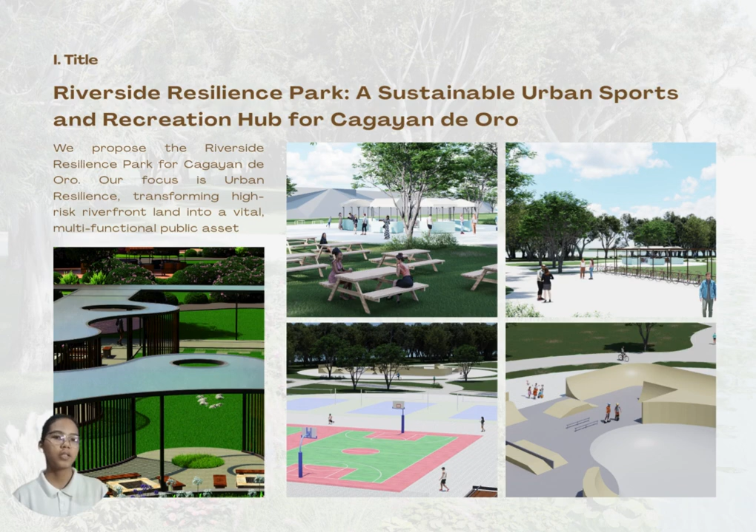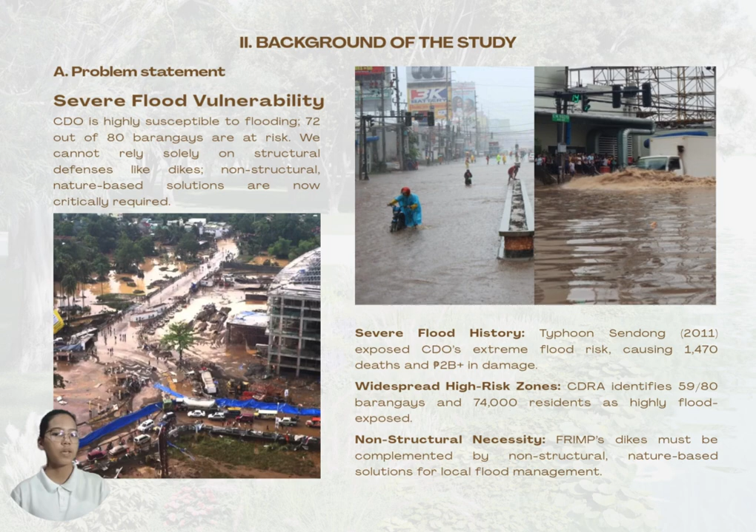Cagayan de Oro is one of the most flood-prone cities in the Philippines. 72 out of 80 barangays are identified as flood risk areas. The city's flood history, especially Typhoon Sendong in 2011, which caused 1,470 deaths and 2 billion pesos in damages, shows that structural defenses alone are insufficient. Dikes and embankments must be paired with non-structural, nature-based solutions to reduce urban vulnerability.

Today, the situation has intensified. Rapid urbanization has added even more impermeable surfaces like roads, buildings and parking areas, further reducing green cover. Despite some isolated tree planting efforts, downtown Cagayan de Oro still lacks continuous tree canopies and functioning green spaces. As a result, urban heat levels have increased, drainage systems are frequently overwhelmed, and 42 barangays now experience the urban heat island effect. The city's natural ability to absorb and slow down stormwater has significantly weakened over time.

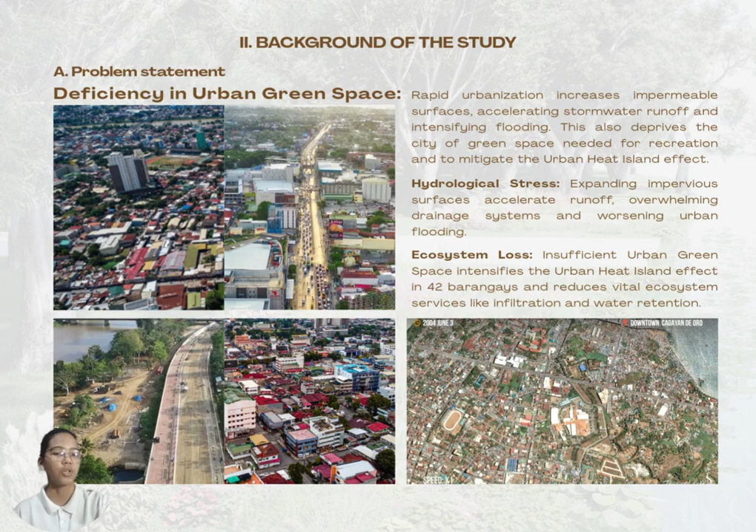Our SWOT analysis highlights why the site is both strategic and challenging. For strengths, its strategic centrality. The site is near City Hall, Liceo de Cagayan University, and Gaisano City Carmen, which ensures high visibility and relevance to the surrounding community. It also offers high accessibility, which supports consistent community participation and daily usage. And lastly, the project has mandated relevance, aligning directly with NEDA's requirement for green infrastructure, making it both timely and highly justifiable.

For weaknesses, the site carries a historical flood risk since it has long been identified as a flood-prone zone. It also suffers from poor existing drainage, which contributes to recurring inundation during heavy rains. And finally, the overall cost of resilient and adaptive infrastructure is higher than conventional development, and long-term maintenance will require steady resources.

For opportunities, the project can act as a catalyst for renewal, revitalizing the entire Carmen riverfront and transforming an underutilized space into a community asset. It also supports education, serving as a living laboratory for climate resilience and environmental awareness. And through its design, it enhances recreation, offering much-needed nature-based leisure areas for residents.

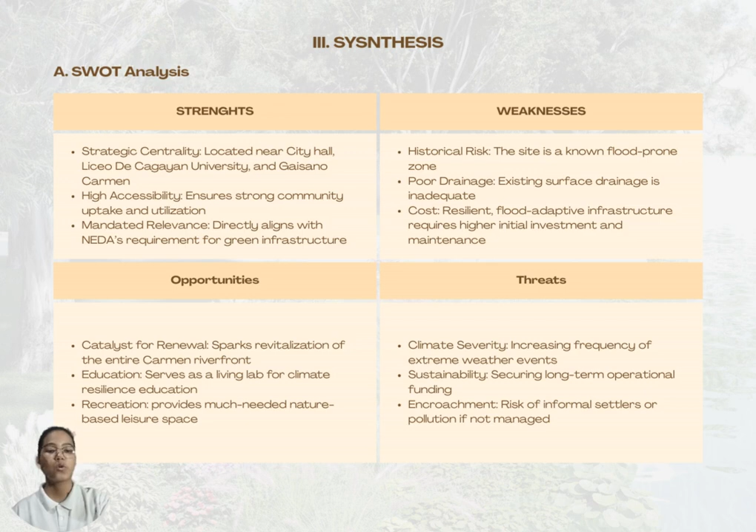And lastly, threats. Increasing climate severity means more frequent extreme weather events, which could challenge the park's adaptive systems. There is also concern with sustainability, since long-term funding and management must be secured for continuous operation. And lastly, the site faces the risk of encroachment and pollution, especially along river corridors, which could compromise both safety and environmental quality if not properly managed.

Now we go to our project proposal. To respond to these issues, we propose the Riverside Resilience Park, a multifunctional green infrastructure hub shaped around the climate realities of Cagayan de Oro City. The park integrates 4 key components. First is the flood adaptive structures. Vendor stalls use temporary tents while essential facilities are designed to be quickly relocated or dismantled before flood events. This ensures safety, reduces damage, and keeps the park functional year-round.

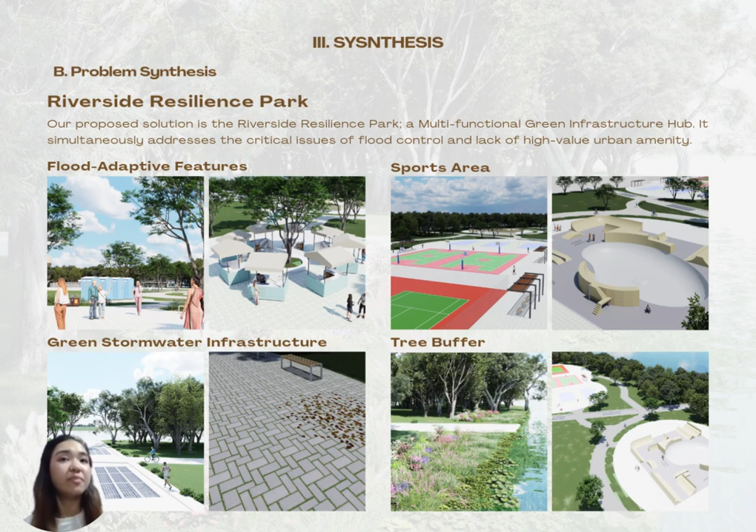Second is green stormwater infrastructure. We enhance the existing canal within the site, supported by bioswales and permeable pavements to improve drainage, prevent soil erosion, and manage surface runoff effectively. Next, the third one is the sports and recreation zone. Courts, open activity areas, and flexible community spaces provide year-round recreation for residents and surrounding barangays. Fourth is the tree buffers and green corridors. Native trees and vegetation help stabilize soil, reduce heat, provide shaded pathways, and restore local biodiversity.

Now, we go to the project synthesis. Our project is tested against strategic filters to ensure it's not just a good idea, but a necessary regional imperative. Filter 1 is strategic merit. We are directly addressing the NEDA SUID imperative, vulnerability reduction, by building resilient, sustainable public infrastructure. This aligns with UN SDG 11 by creating inclusive, resilient cities. We're upgrading critical settlements through nature-based defense systems. It also satisfies SDG 13. This is urgent, local action to combat the destructive impacts of climate change, specifically the intensifying flood risk in our region.

Now, we go to filter 2. In filter 2, we have disaster risk reduction and relevance. The core design satisfies the DRR criterion, and our solution is a green infrastructure system. The very heart of the park is a flood adaptive design. This concept means integrating bioswales and detention ponds to actively manage stormwater and mitigate local flooding, turning a hazard into a feature.

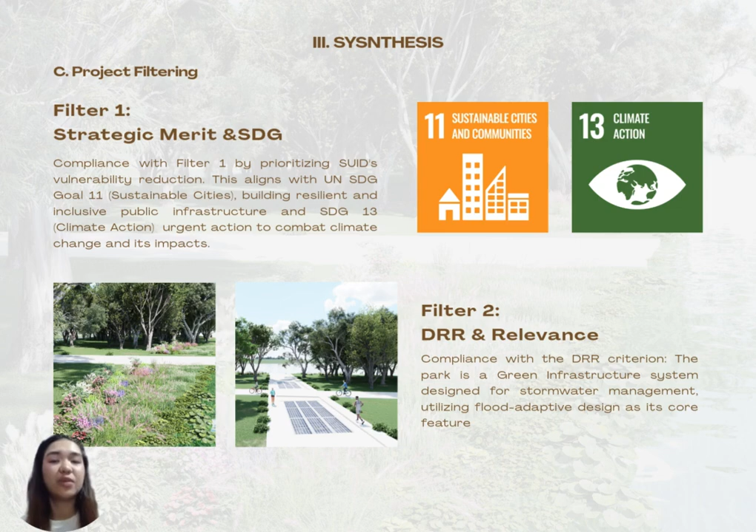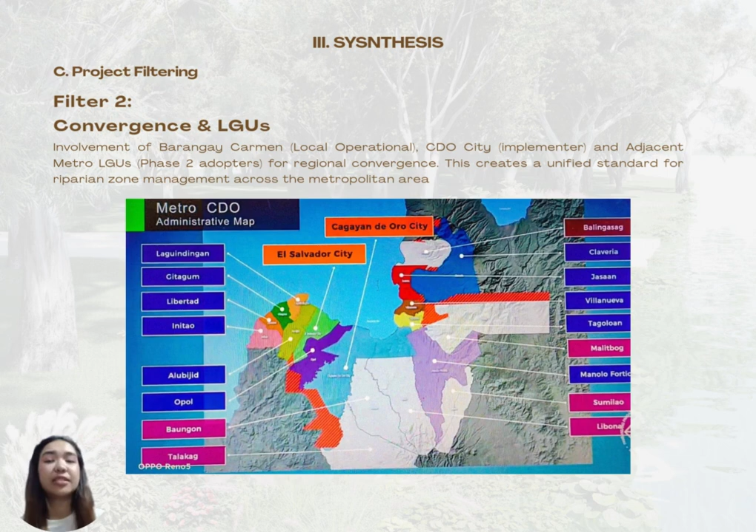Finally, we go to the convergence and local government units involved. A metropolitan problem requires a metropolitan solution. This project initiates regional convergence. This park is a pilot for our unified standard of riparian zone management. The immediate implementation is in Barangay Carmen in Cagayan de Oro City, but immediately involving adjacent metro LGUs for regional convergence. This ensures that the efforts in Cagayan de Oro City are complemented by our neighbors like El Salvador City and others. A unified standard is the only way to manage the river systems effectively across the metropolitan areas.

Next is the project detail. The Riverside Resilience Park is designed as a non-structural flood defense system for the neighboring district. Its core strategy is to use engineered landscape features and adaptable, movable components to manage stormwater while still functioning as a vibrant public park. Dual-purpose design elements such as the skate park functioning as a detention basin and vendor areas using removable tent stalls ensure maximum flood resilience and high operational efficiency.

This approach positions the park as a leading model for climate-adaptive urban development within the city. Urban resilience and flood mitigation. A key feature of the project is the skate park. Under normal conditions, it serves as a recreational space with bowls and ramps. During extreme rainfall, its bowl-shaped geometry allows it to operate as a temporary detention basin, capturing, holding, and slowing down excess stormwater to reduce downstream impact.

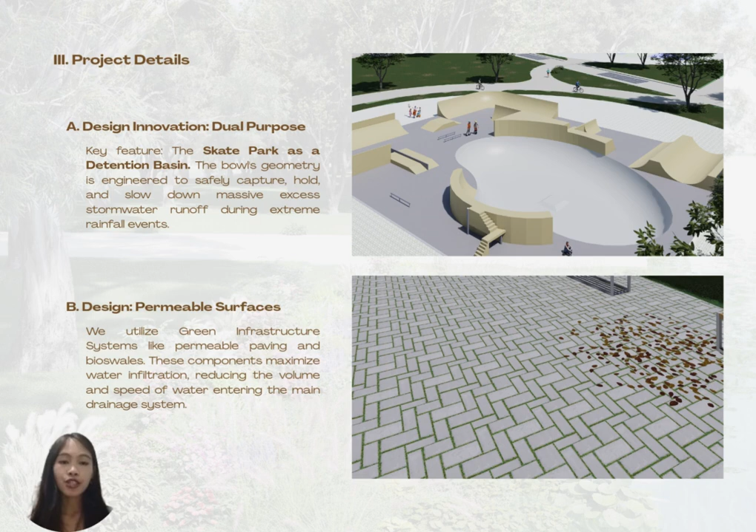Across the park, green infrastructure systems such as permeable paving, bioswales, and rain gardens work together to absorb, filter, and infiltrate runoff. These features reduce the volume of water entering drainage lines, lowering the risk of flash flooding. All essential services, including vendor areas, public toilets, and kiosks, are designed as movable or modular structures. Tent stalls can be dismantled during flood alerts, modular toilets, and small kiosks can be relocated to the higher ground, ensuring that infrastructure remains safe and functional after flood events.

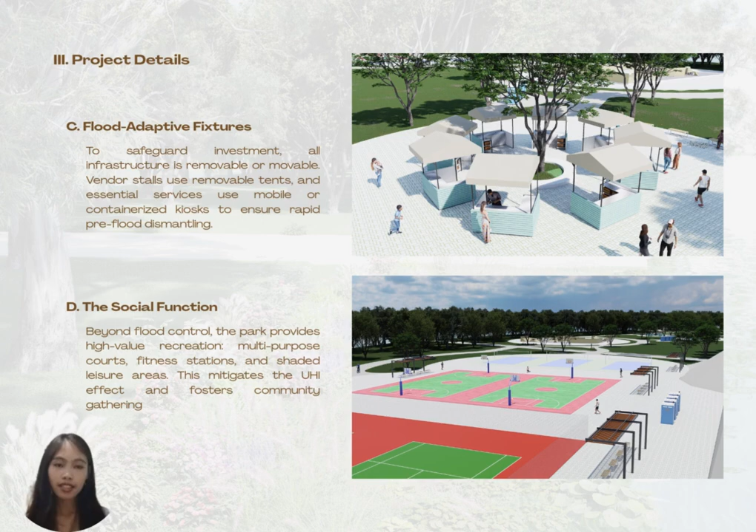For the sports, recreation, and social hub, beyond flood resilience, the park enhances community life by providing both active and passive recreation spaces. Active features include public multipurpose courts, fitness stations, jogging and cycling paths, and a central plaza for gathering. Passive zones offer shaded picnic spaces, riverside seating, and native tree planting to reduce heat and create comfort. The park also supports local entrepreneurship and environmental education through its designated vendor and learning areas.

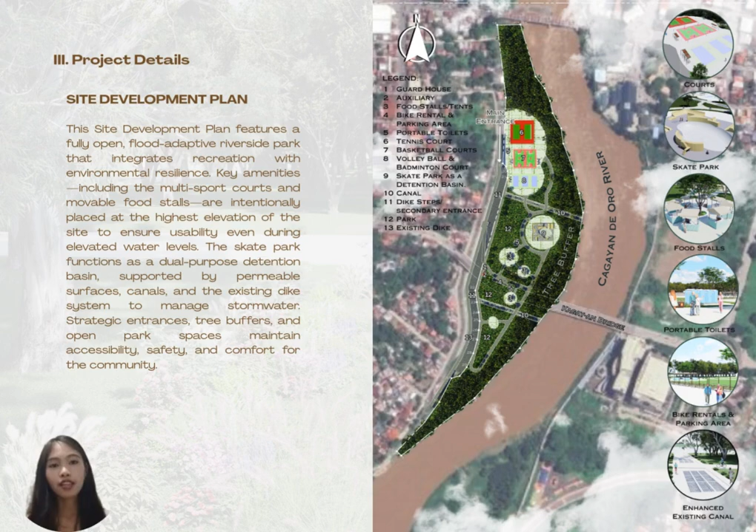For the site development plan, the project covers 59,502 square meters or 5.95 hectares with a perimeter of 1,566 meters. Since it is located in a flood-prone zone, the park follows an open, non-structural design approach. No permanent buildings are constructed. All amenities remain movable, modular, or temporary, ensuring full adaptability during flood events. The site development plan organizes the park according to elevation, safety, and flood flow. Entrances, tree buffers, open lawns, and pathways ensure accessibility, comfort, and efficient circulation.

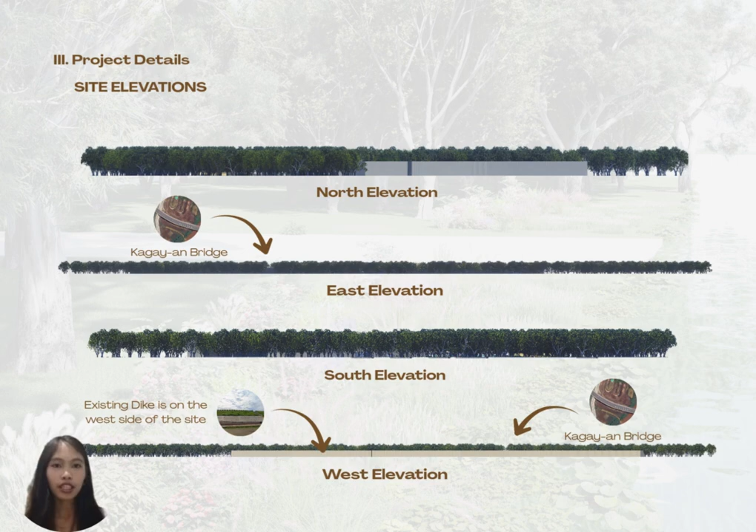For the sections and elevations, they illustrate the park's open, flexible nature, the height relationships between active and passive zones, and the integration of green infrastructures across varying site levels. For the project phases, Phase 1 is site preparation and flood mitigation, infrastructure clearing, grading, and installation of permeable paths, bioswales, and rain gardens, zoning active and passive areas.

Phase 2 is core recreational facilities: construction of the dual-purpose skate park, installation of modular toilets, movable kiosks, tent stalls, paths, and shaded spaces. Phase 3 is landscaping and enhancement: tree planting, riverside seating, community areas, and expanded stormwater features. Phase 4 is community and vendor integration: opening vendor spaces, deploying tents, and conducting community orientation. Phase 5 is monitoring and adaptive management: evaluating flood performance, adjusting movable structures, and refining resiliency strategies over time.

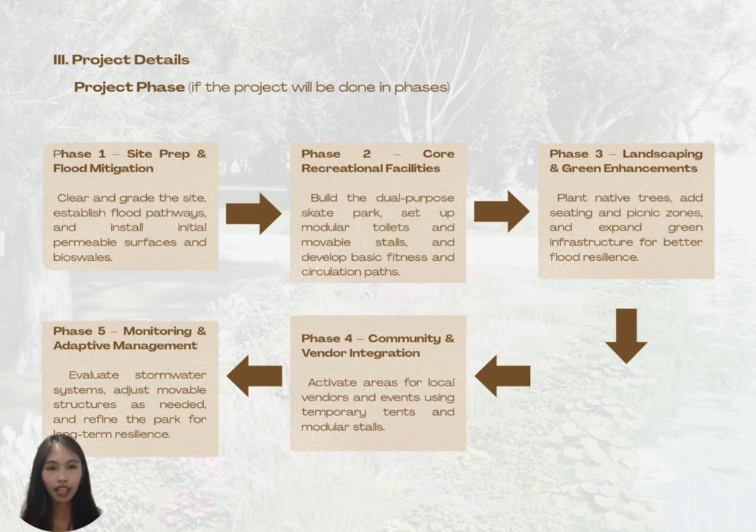For the project impact, I will present how the Riverside Resilience Park contributes to the UN Sustainable Development Goals, how it responds to the sustainable urban infrastructure development identified vulnerabilities, and how it improves sustainability and livability in Cagayan de Oro City. Our project directly supports SDG 11, which is Sustainable Cities and Communities. We transform a high-risk flood-prone riverside area into a safe, accessible, and inclusive public park. The integration of green infrastructure, recreational amenities, and adaptive structures reduces environmental risk while improving urban quality of life.

The project also advances SDG 13, which is climate action. By using nature-based solutions such as bioswales, rain gardens, and permeable paving, we reduce stormwater runoff and improve infiltration. The skate park doubles as a detention basin, capturing excess stormwater during extreme rainfall. This strengthens the city's climate resilience.

Then, based on the National Economic and Development Authority or NEDA and Sustainable Urban Infrastructure Development or SUID Master Plan, Cagayan de Oro faces chronic flood vulnerability and lacks non-structural mitigation systems. Our project solves this by introducing a green infrastructure park in a designated vulnerability hotspot. This prevents unsafe development in a high-risk area and strengthens riparian management along the riverfront.

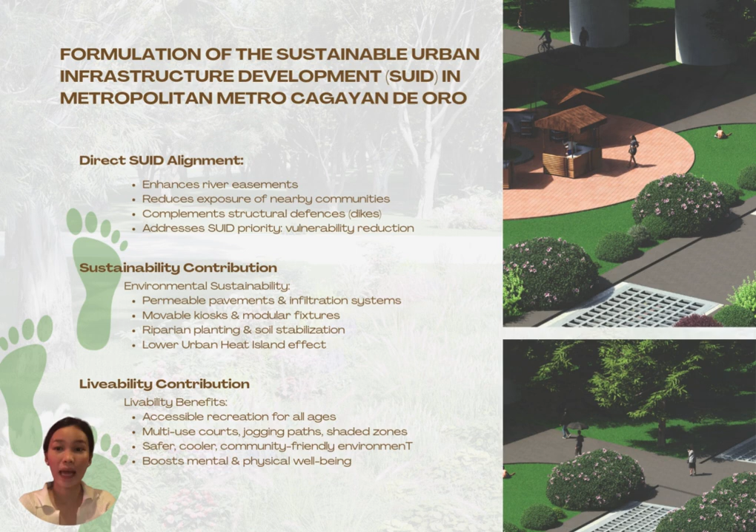For livability, the park provides accessible recreation such as courts, jogging paths, open lawns, and shaded resting zones. Because it is centrally located near City Hall and Liceo de Cagayan University, it will be highly used by students, workers, and families. This enhances physical health, social interaction, and overall community well-being.

So, in summary, the Riverside Resilience Park matters because it solves multiple high-priority problems faced by Cagayan de Oro. First, it provides non-structural flood mitigation, which the city urgently needs. Barangay Carmen is a designated vulnerability hotspot, and this project acts as a protective buffer that reduces runoff, increases infiltration, and gives excess water a place to go.

Second, it addresses the city's significant lack of public green space, especially in dense urban cores, by transforming an underutilized hazard zone into the district's largest riverside park. We deliver recreational, social, and environmental benefits that the community currently does not have access to. Third, the project repairs and restores the degraded riparian ecosystems, stabilizing riverbanks, improving biodiversity, and reducing erosion. This is essential for long-term river health and aligns with national environmental guidelines.

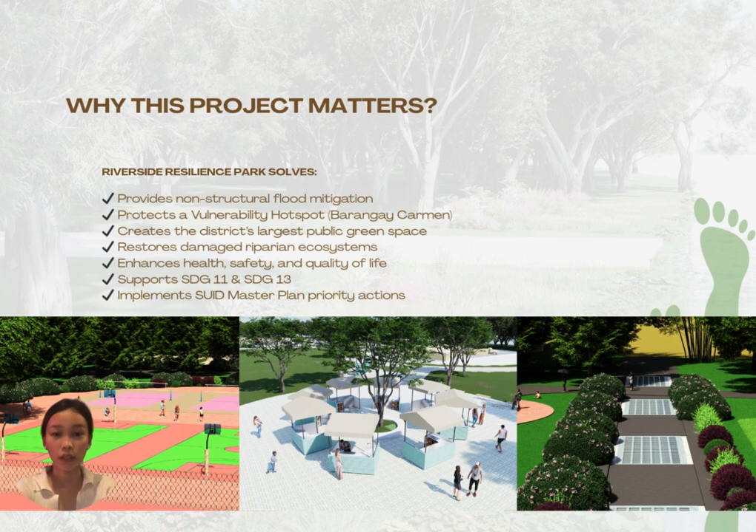Fourth, it enhances urban livability by offering safe recreation, shaded walkways, open spaces, and community facilities, all of which directly benefit students, workers, and families who regularly traverse this central area. And, finally, the project aligns directly with UN Sustainable Development Goals 11 and 13 and fulfills the NEDA SUID Master Plan's mandate for vulnerability reduction and climate adaptive urban planning. Overall, it transforms a dangerous, neglected riverfront into a resilient, functional, and socially valuable asset for the entire city.